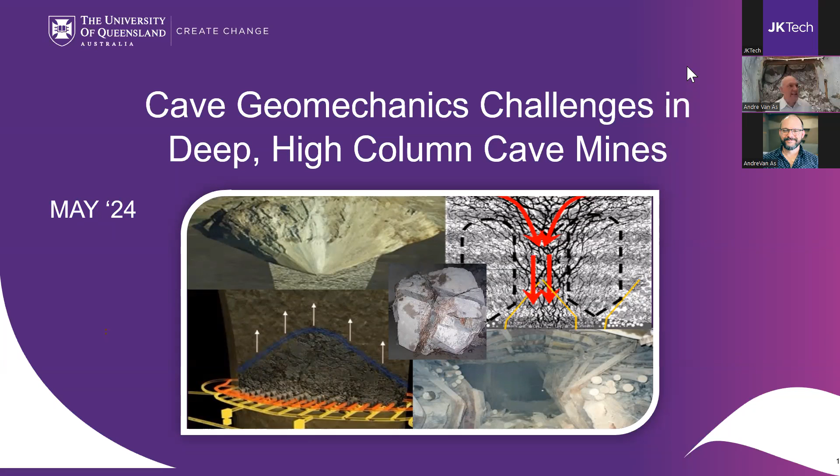Just to start, a little bit about myself. I'm an underground geotech engineer. I've spent just over 30 years working in caving and caving projects. I started my career with De Beers and then moved to Australia to help build the first block cave, which I'm quite proud to say I participated in along with some of the colleagues online. I worked at Rio for probably just over about 22 years, and then I set up my own consulting, only because I was missing out on all the good technical stuff, so I wanted to get back into that. I think I've been involved most of my career in caving mines, mostly underground.

I sit on a few review boards, and I get to see a lot of the caves. I'm fortunate to have been involved in many of them. I've got a few papers out on caving, and I guess my claim to fame is with Rob - we introduced the whole hydraulic fracturing in cave mining back in '97.

And then somehow I ended up joining UQ with the W.H. Bryan Mining Geology Research Centre at UQ. They established the Deep Mining Geosciences group, which they've asked me to lead. So just a little bit about that.

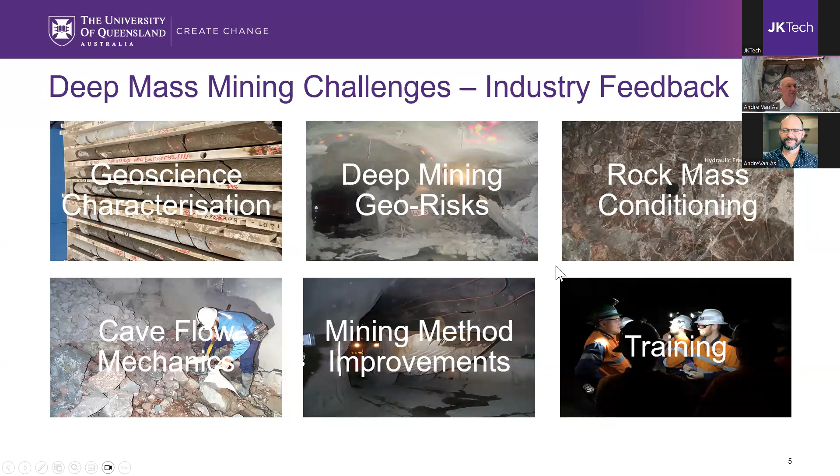Just in case I don't get to cover everything, I wanted to show you that there's pretty much 5 research pillars that we're focused on, and of course training is inevitable and a huge component of all of that, so I've had that as the 6th pillar to the work I'm doing. The first is geoscience characterization, because it's more than just geotechnical engineering - it's geology, it's hydro, it's all of that. That's probably one of the biggest concerns industry has as we're going deeper and facing cave mines, but I'll get into that later. The other ones are around deep mining risks, rock mass conditioning - note I'm not calling it preconditioning, because it's pre, post, and during. My hobby horse, cave flow mechanics. We're also looking at alternative mining methods, or improving existing mining methods so we better handle deep mass mining. And then, as I said, training is a big component, which I really enjoy.

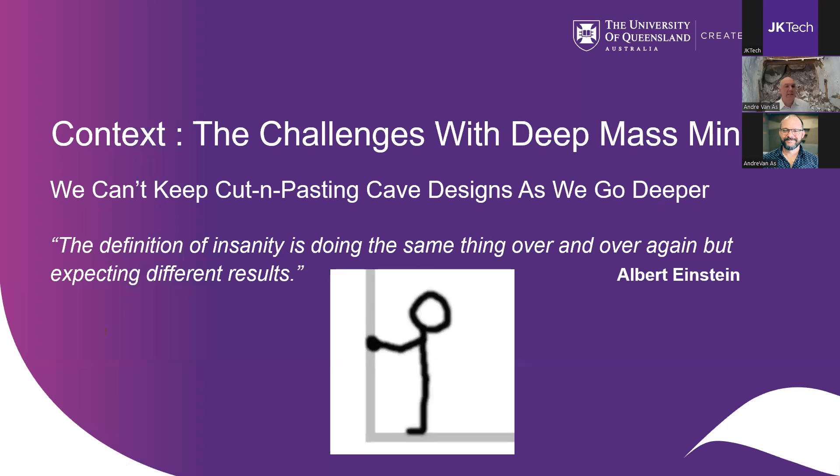So just a little bit of context first. You might get a sense of my frustrations on some of these topics because of the images I've got, but forgive me for that - it's the only time I get to show these. But really, my main point here is, as we're going deeper, we can't keep on doing the same thing, and we can't expect this sort of cut and paste approach that we've commonly seen, particularly in cave mines, to still bear the same fruit as we go deeper. So I just want to talk a little bit about that.

Why are we going deeper? Why are we focusing on deep cave mining, deep mining? Well, the fact of the matter is, there's this huge push to transition from fossil fuels to electric and so on. So there's a lot of critical minerals, and copper's one of those. If I just look at the copper analogy here, a lot of the big surface and near surface deposits are nearly completely exhausted. Outside of things like Escondida, even Codelco is going underground, is completely underground. And really, it's not a matter of running out of copper - there is copper.

There's lots of copper, but it's deep—we're talking about 2 to 3 kilometers. The question is, how do we tap into that copper? We're looking at doubling our copper demand; it has doubled over the past decade. And I've read, whether it's correct or not, that we're looking at mining more copper in the next couple of decades than we've mined in history. So clearly there's this drive for more copper, and as you all know, copper price is soaring—today it was around $5 US a pound.

There's clearly a need, and most of these large, massive deposits we find in deep ore bodies are pretty low grade. So it's simple economics: deep underground mining is complicated and needs a lot of capital. The only way we can produce those tons is with a mining method that can deliver large tonnage at low grades to make it economic.

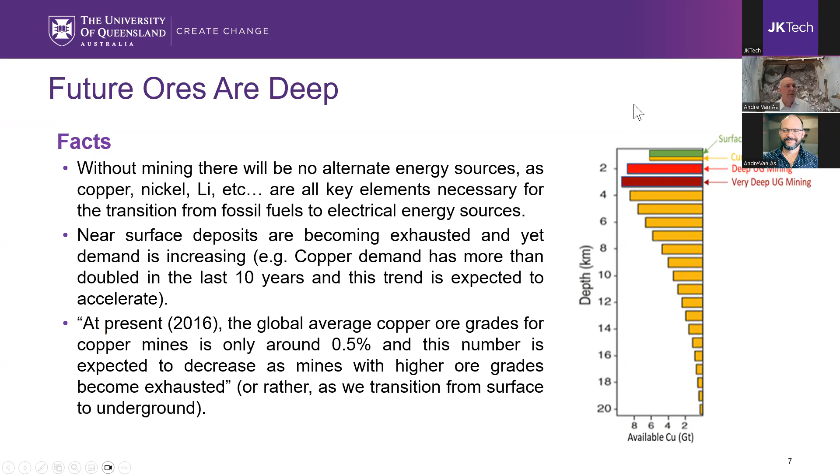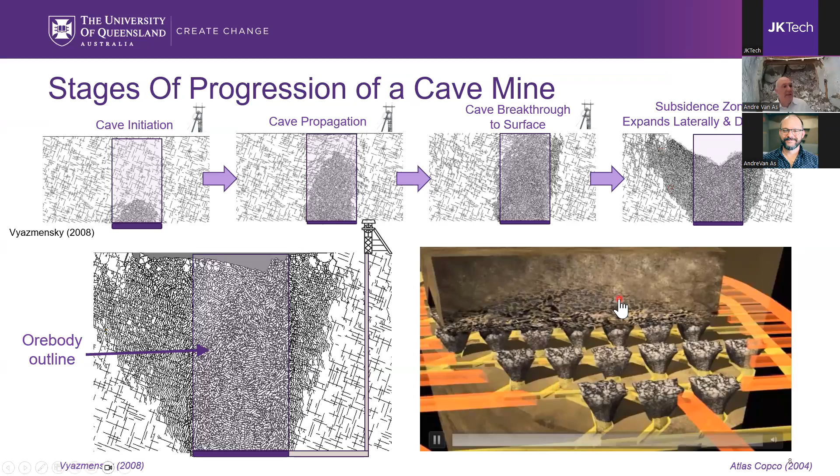And then as we continue to draw this cave, the subsidence zone expands laterally on surface. Now it doesn't become this bottomless pit hole—it does tend to stabilize, typically of the order of a couple hundred meters deep—but nevertheless it is an expanding subsidence zone, and as we continue to draw, the subsidence zone expands. So very simply, that's caving.

So why do we do caving? Really, it's a very cost-effective mining method—we use gravity and the stresses to break up the rock. We only blast the undercut, and after that we're purely at the mercy of natural forces. The neat thing about caving is it's really easy to mechanize. On the production level we have automated LHDs, or even if not automated, it's pretty regular geometry and layout, so it's quite easy to produce fairly high tons out of these mines. The only downside is you need high capital costs up front to establish and develop this intricate network of tunnels, draw points and drawbells. But once it's there, it allows us to produce a lot of tons at a fairly low operating cost.

It's also probably one of the safest mining methods, and ultimately it's probably best suited to extract low-grade, large deposits in large quantities.

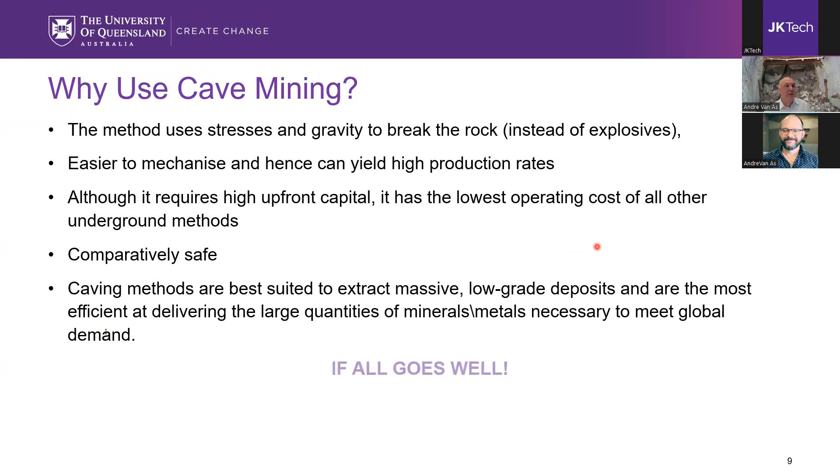Certainly it's probably the only underground mining method we have in our arsenal that can really meet the demands of metal in the future. And that is to say, if everything goes well. In all my time working on caves, I don't think I have an example where it's gone textbook well. All of them have their issues and problems, and I think those problems are going to be exacerbated as we go down deeper.

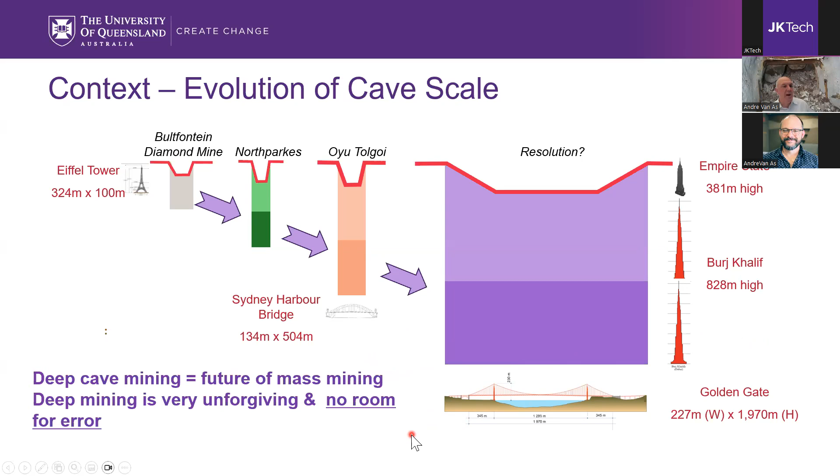And deep mining can be very unforgiving, with not a lot of room for error. Now, why do we go deep, you might ask? I think it's pretty obvious. We have these deep high column caves for a simple reason: it costs a lot of money, a lot of capital up front to develop these mines. So you can imagine if we have a very high lift, we can reduce our capital spend. We'd rather spend it once than several times.

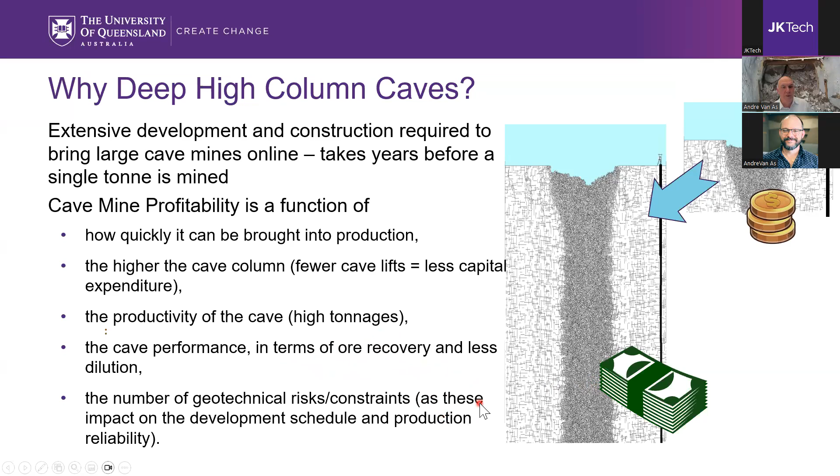So we see this transition from near surface shallow block heights to deep high column caves. You've got to understand that all this capital investment, if you look at what's public, Oyu Tolgoi is in excess of 7 billion, and most other caves cost billions to set up, before you've even mined a ton of ore. So there's quite a lot of risk up front, and you want to bring this cave into production as soon as possible, and want it there for the next 10 years or so. It's really a matter of profitability being a function of height, in effect. To meet these large tonnages, reduce capital spend, and reduce operating expenses, we really want to go deeper and have these higher columns, but they do bring about more risk, and I'll talk about that now. So let's talk about these deep high column caves.

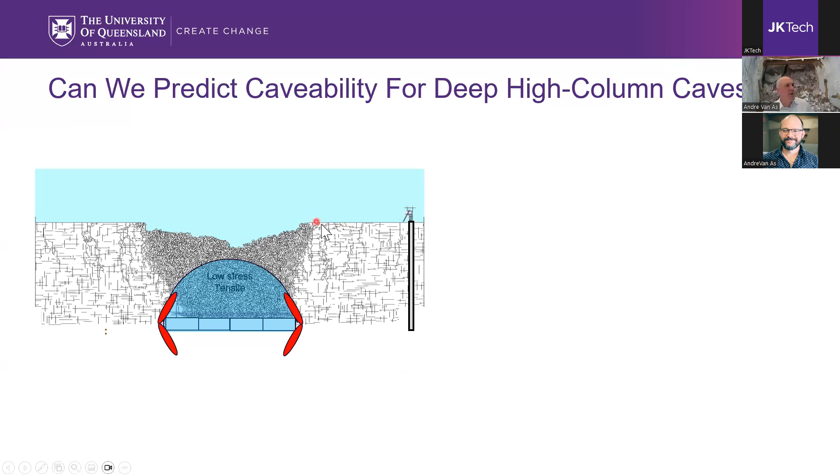So first thing, excuse my cartoons, but what I'm trying to show here is that pretty much these shallow caves that we've had in the past were really low stress caves, large tensile zones, where tensile zones are a function of the span. What you might argue is that a lot of the work done by people like Laubscher and so on to predict things like the caveability of the deposit were really based on near surface caves, where the stress regime is quite different. It's quite different to something that has a high column and deeper, and you've got to question how applicable these empirical criteria are for these deep caves.

Now, I'm a big fan of what Dennis Laubscher has done, and I'm not criticizing. I think he's really brought so much to the caving world. But we just got to be careful when we try and apply some of the empirical methods that were designed for a different environment and a different circumstance. We can certainly learn from them, but we just got to understand their limitations.

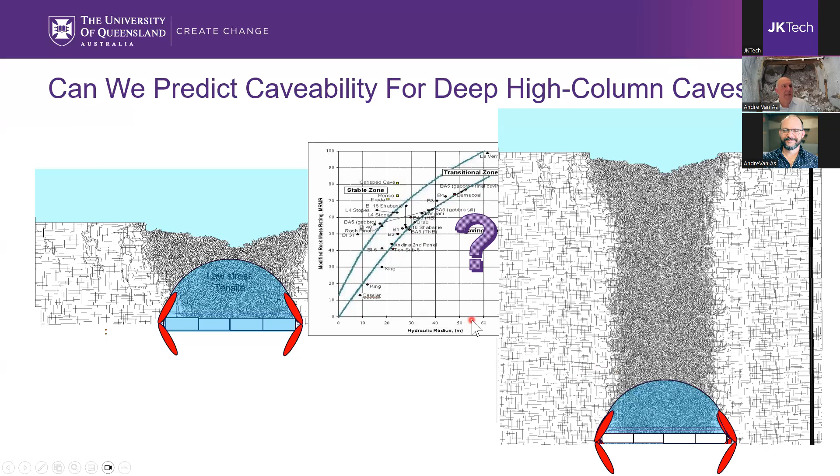So one of the big things with these caves is that we've got to realize that because they're deeper and because they have really high columns with large aspect ratios, the ability to cave is not just a question of caveability, it's a question of how these caves cave. If you look at the examples I've just pulled out of publications, you can see that potentially there's quite a lot of ore at risk that we can't recover. Remember that we've only got draw points to control the propagation of this cave, and then we're at the mercy of natural forces.

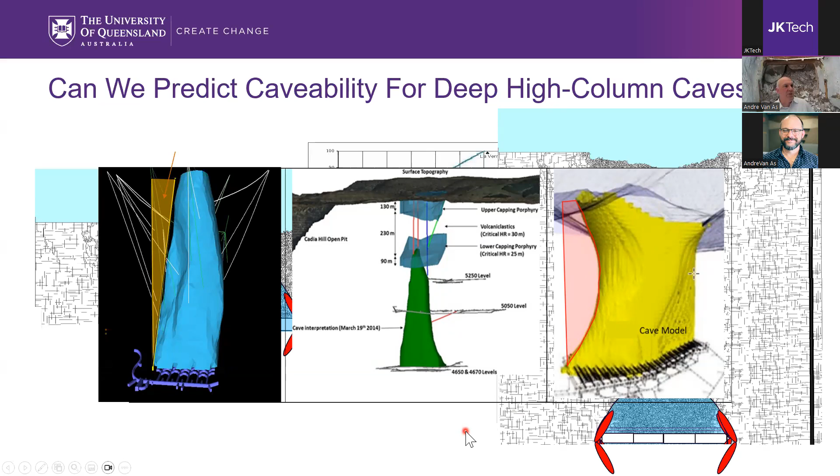So there is certainly a lot of precedent in our modern caves with these high aspect ratios for us to leave a lot of that resource behind. And that's a huge risk that we really need to address, and it can be addressed. I'm not saying it shouldn't be, but we must be aware of this. Certainly, I think it's very important that our shareholders and investors understand this, because if we go there and say we're going to recover everything at 100%, I don't think there's precedent anywhere in the industry yet that has done that. But anyway, it's a lot more challenging when we have these high aspect ratios.

So I want to just talk about undercutting now, and I want to say that it's one of those methods that's really important for block caves. The undercut level is key, and the undercutting process is really key to sustaining the integrity, or preserving the integrity, of the rock mass on the production level. We really need to be careful that we actually protect that rock mass.

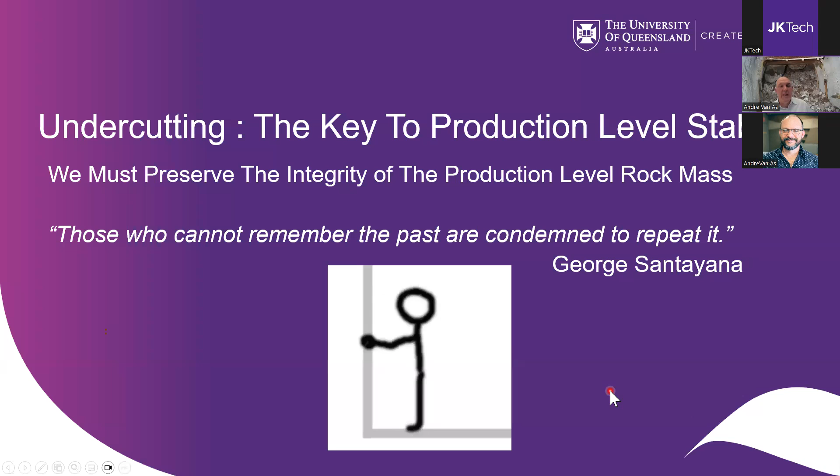So what is an undercut? First of all, I think I've already mentioned this, but just quickly - look, it's when we cut out the slot or the stope down below so that we can get caving to naturally occur. So we cut out the slice near the ore body, we blast that out across the ore body, and then caving is induced.

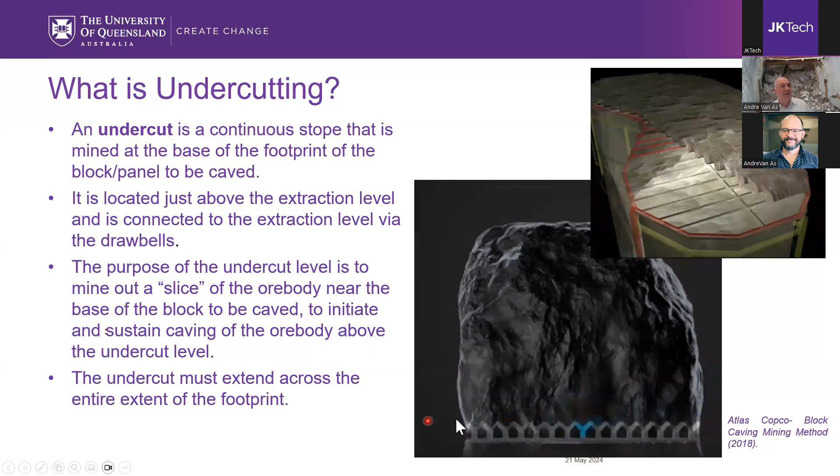Now, there's different types of undercutting, but how we do it is important. What we want to do when we undercut is preserve the integrity of these drawbells and these pillars between the drawbells, because you've got to realize that these drawbells and draw points have got to draw, especially with high column caves, probably well in excess of 300,000 to 500,000 tons each. So you can imagine a lot of wear, a lot of loading. And so if we're going to keep them in production over their life, we've got to really look after the integrity of that rock mass.

So this is where we come to the different undercutting scenarios. So the more classic post undercut, or conventional undercut - this is what characterizes this type of undercut - is that we have the drawbells and the pillars and so on, the draw points developed ahead of the advancing undercut face.

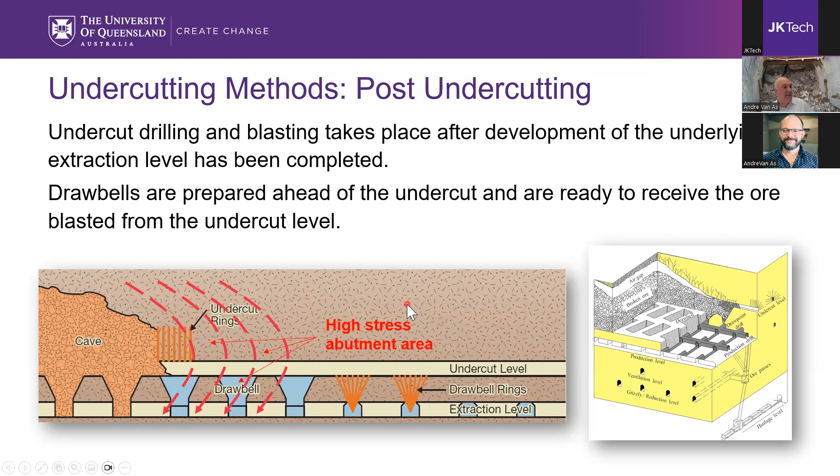The good thing about this method is that it does allow the miners to separate the development of the extraction level and the undercut level. So you're not constrained, and you can bring the cave on quicker. That's a really nice feature - being able to bring a cave on quicker is really good, because it allows us to get production earlier. The alternative to this is that we use what we call an advanced undercut, where the undercut exceeds or is in advance of the development.

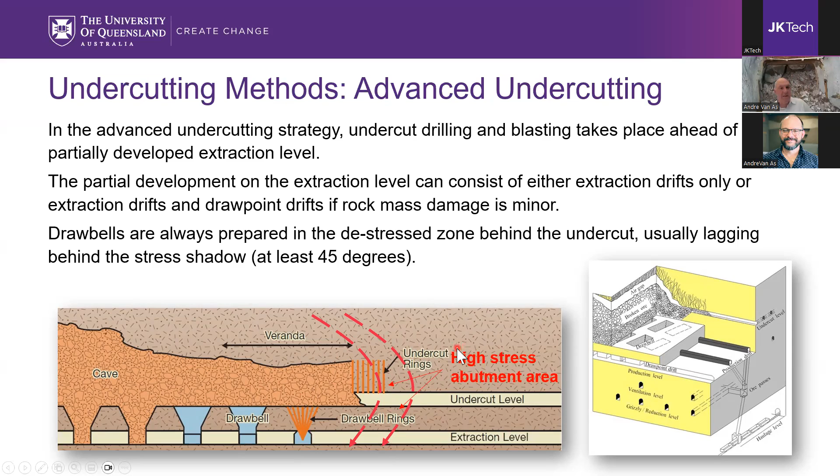The problem with this undercut, though, is that it does constrain the advance of that undercut. So you can imagine the logistics - that undercut rate in advance is really constrained by the development of the draw points and the drawbells. So it is a balancing act. It's very important that this is synchronized, and this does slow down the undercutting process. That means a cave with an advanced undercut comes online slightly later than, say, if you adopted a post undercut. But there are problems, right?

So you can imagine, especially when you have a lot of high stresses, what we find when we undercut is we get a lot of drill and blast hole dislocations. We get incomplete blasting associated with that. And so what we have is these pillars forming in the undercut, which I'm trying to show here.

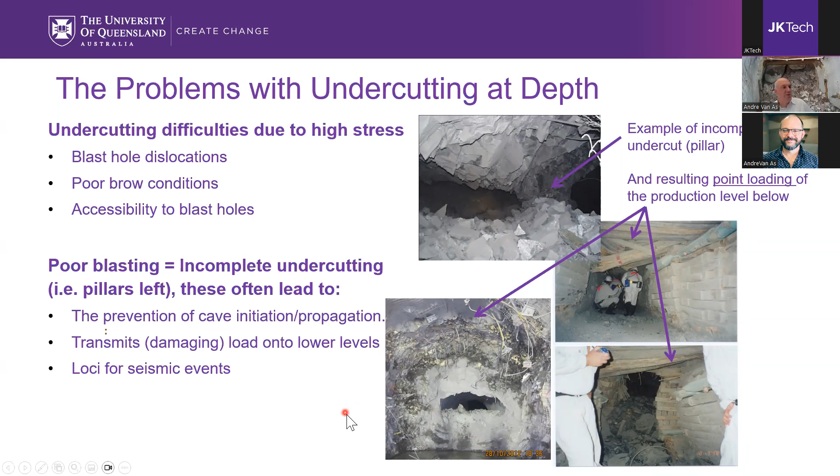And these pillars become stress concentrations. That's a real problem, because down on the production level below, all the stresses tend to focus and concentrate on that, and we point load the tunnels below. This tunnel over here - you can see this was a 5x5 or 6x5 meter tunnel that's completely closed. Why? Because we left a pillar up in the undercut. So this shows you how extensive the damage is.

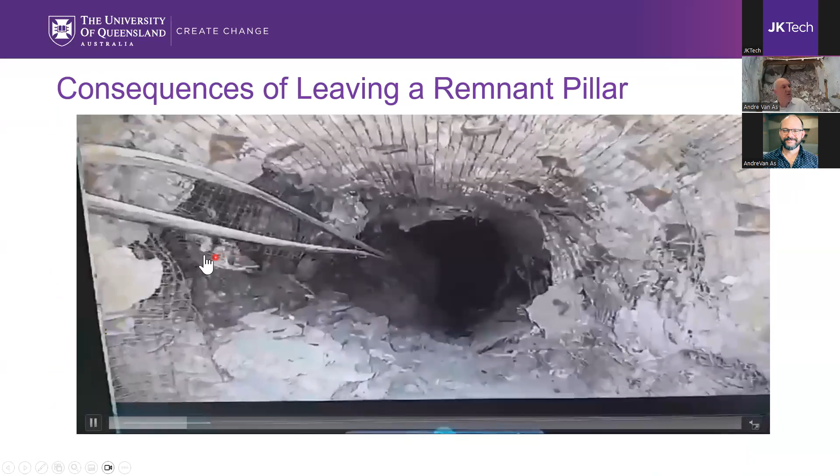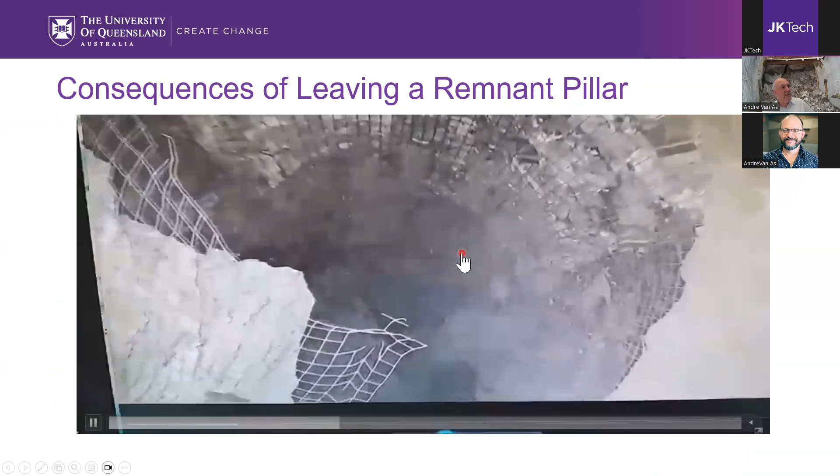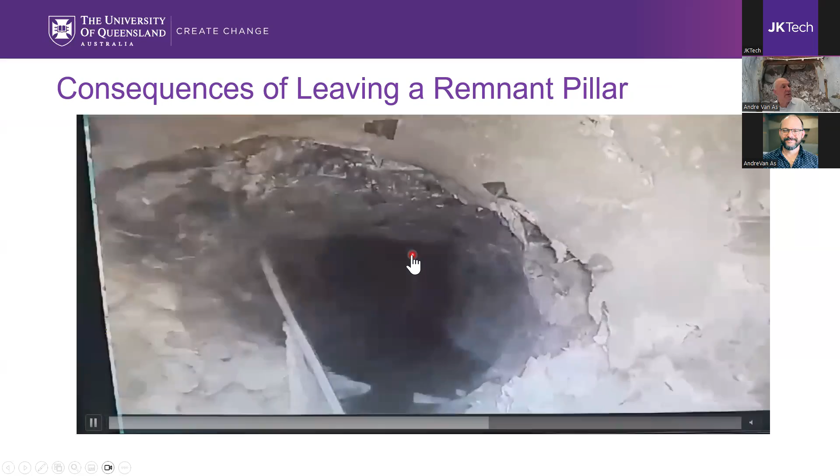What I'm showing you here is hot off the press - I won't tell you where it's from, but if you look at this tunnel, we're flying down a production level. Look at the damage that's caused. Now, this wasn't a rock burst - this is purely from a pillar left on the undercut. I won't tell you where, but the point is the damage is extensive. Imagine, this is the type of damage you can get if you get an incomplete undercut. You can completely obliterate or severely damage the production level below, because of the incredibly high stresses above.

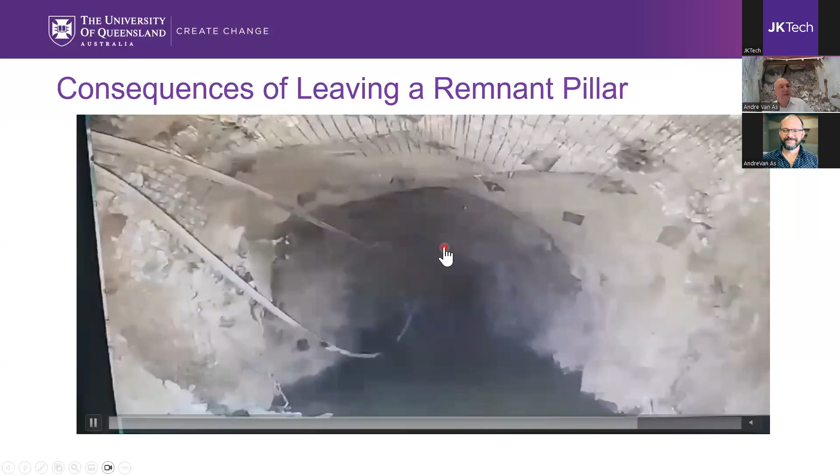This is the type of thing we've got to minimize, and we can't afford to leave these pillars behind. The problem is, though, the higher the stresses, the more difficult the drill and blast process is. So I won't keep going, but the other thing we've got to realize - I just showed you a problem with static stress, but we've still got the dynamic problems.

And here we have rock bursting that occurs in cave. This is not uncommon, where we have pretty hard rock and very high abutment stresses, and they can produce rock bursts. And they're not pleasant. What is a rock burst? It's pretty much a violent ejection of rock that typically explodes outwards.

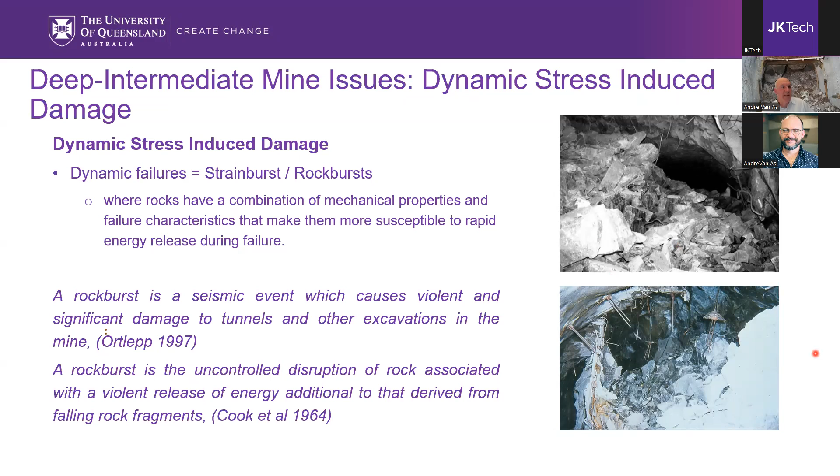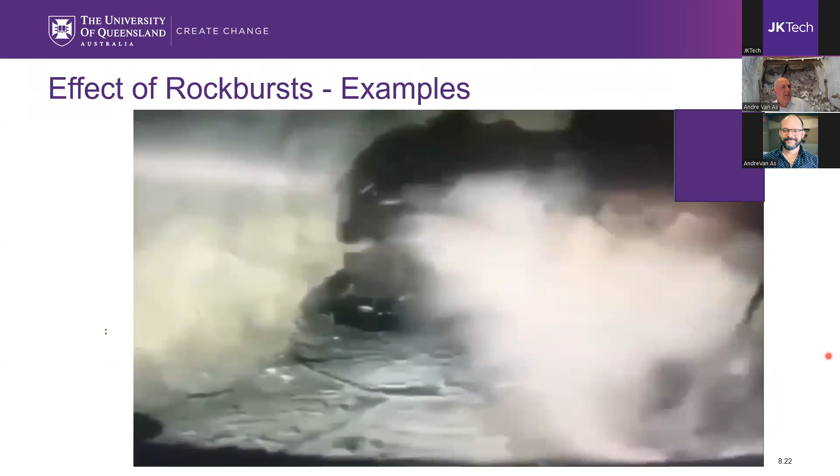I think it's best if I just show you some videos. If you look at these videos, hopefully you can see it - watch the wall on the right, and you can see what a rock burst looks like. There you go. Now, I just want to point out, both of those guys were okay. They might have had to change their underpants, but nobody was hurt here.

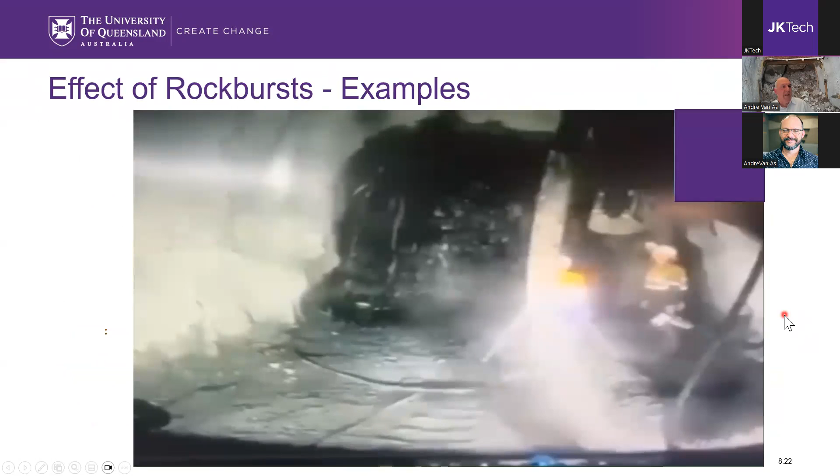So it just gives you an example of what a rock burst looks like. Here's another one - now you'll see the burst occurring from below in the footwall. Watch that LHD, watch this jumbo be ejected upwards. That's a couple of tons of jumbo being pushed up into the air through a seismic event down in the footwall. It's pretty impressive - the energies here are incredible.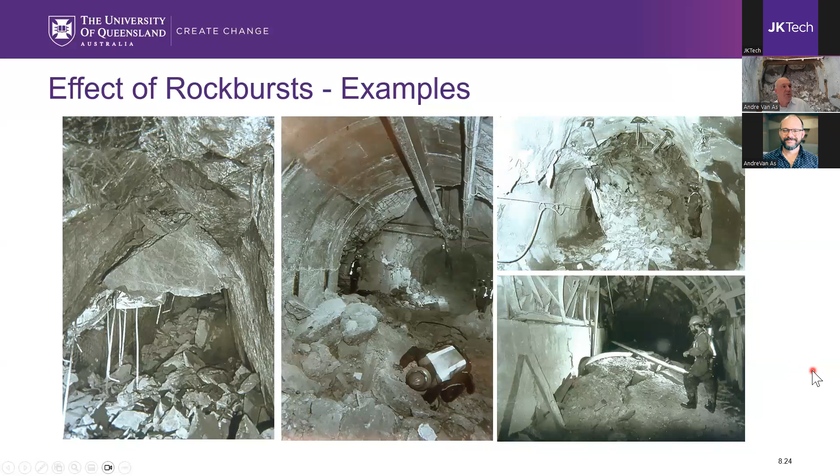What I'm saying is that we need to do everything we can to minimize this type of damage and exposure to personnel and so on. And the way we do this is sensibly undercutting.

Just as part of what we're doing in this space, I want to plug for the DMG. We're looking at undercutting methods, taking data from some of our mines, and thank you for those mines that have sponsored this. Particularly want to shout out to Oyu Tolgoi, who has the most extensive extraction level monitoring I've ever seen and has ever existed - that really allows us to look at that.

And we've got a master student here that's done a lot of excellent work, especially back analyzing all of this and looking at the type of deformations that we're seeing. That allows us to compare the undercutting methods. Now, we're not comparing models - this is actually real data. So we're comparing undercutting strategies, and we're looking at the deformations that we're getting on the extraction levels.

We're trying to evaluate and demonstrate quantitatively exactly what this is, what types of undercuts are best for deep caves. From that, we hope to come up with some suggestions, modifications, and perhaps ways of improving the undercut method. We're also looking at things like rock bursting and being able to quantify the pros and cons of the different methods and the risks associated with these methods. Really the idea is to develop a reliable, suitable mining undercut level for these deep environments.

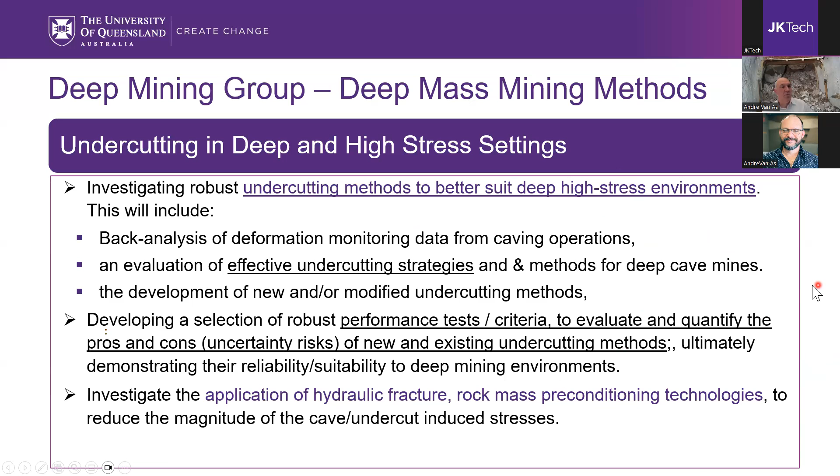I'm not going to talk too much about rock mass preconditioning because I have a section later on, but obviously one potential way of managing high stress and rock burst is through rock mass preconditioning using hydraulic fracturing. This is what we're doing currently, and to anybody who has provided data, Northparkes, Freeport, we really appreciate your support.

The other thing I thought I should throw in here - we're also looking at geohazard management, doing some work to use real data, not models, doing back analysis of this data, linking it in with the production and the undercutting, and looking at how we might be able to use machine learning methods, data-driven applications, to better design and better manage these geohazards. So we're looking at developing more real-time geohazard or georisk tools that could, using machine learning, be more predictive and give us a bit of a warning about potential hazards occurring ahead of undercutting.

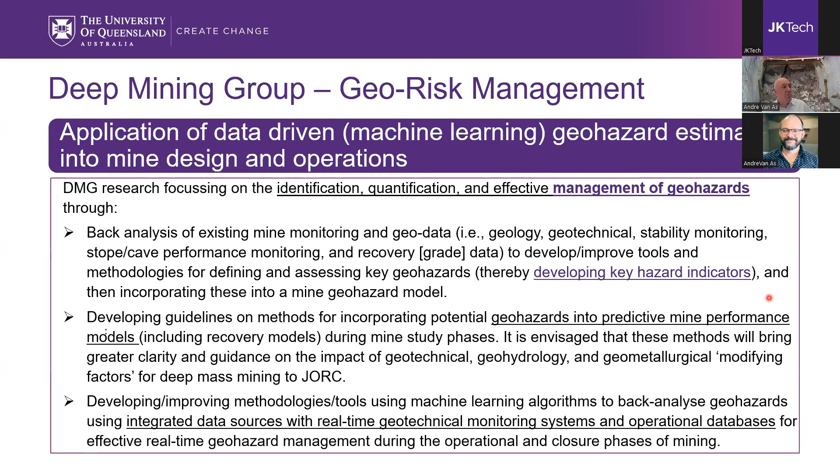I'm not going to elaborate on that too much because I haven't got time, but for those of you who might be interested, I'd love to talk to you later.

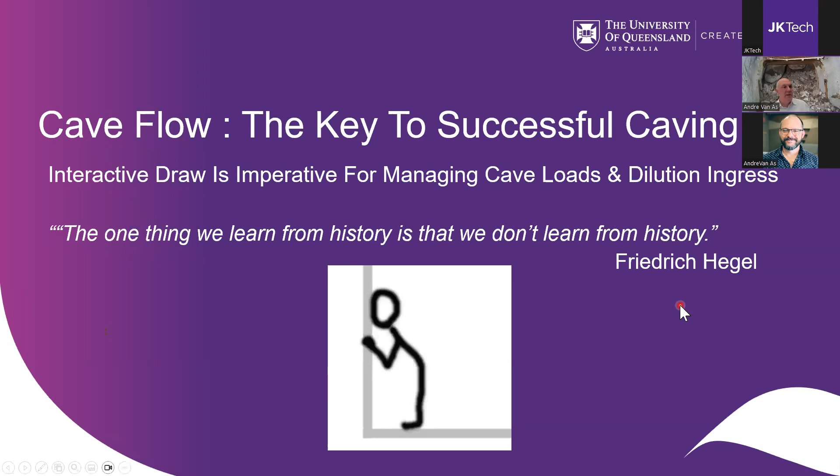So now I get to talk about my bugbear, which is really cave flow mechanics. The key terms here are interactive draw, and that's really important to be able to manage cave loads and dilution ingress. I think it's probably one of the most important topics that we're researching.

So the challenge, for those who don't understand or appreciate this, is that you can think of these draw points, draw spacing, as these big silos that we develop, and as we draw from these draw points, we develop these cones of movement.

Now theoretically, what we're trying to do is get the material that's moving in the cave to move as a mass flow. So what we're trying to do is get it all moving uniformly, and the only way we can do that is to design our caves to be correctly spaced. In other words, all the draw points need to be near enough to facilitate this mass flow and this interactive draw.

But at the same time, we've got a delicate balance between interaction and stability of the extraction level. We can't have the pillars and these silos or drawbells too close, otherwise we cause instability in the pillars. So there's this tension between stability and interactive draw.

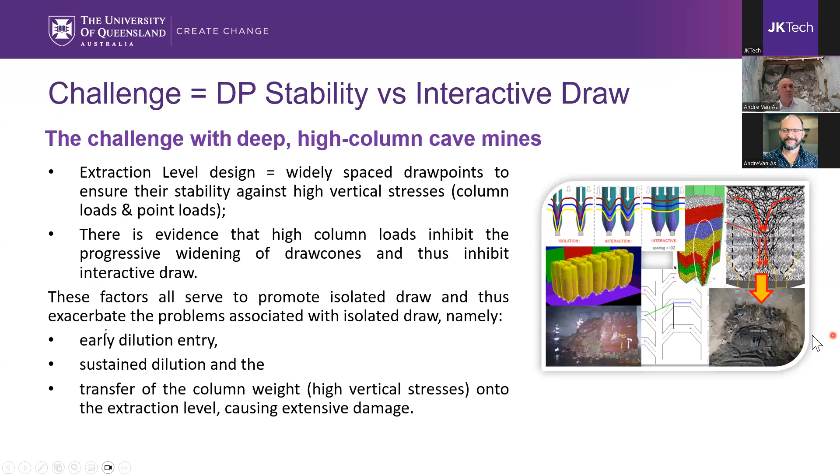The consequences of this lack of interaction, which we call isolated draw, is that we get a lot of problems associated with that. On the left, I'm trying to show the difference between interactive draw and isolated draw. Assume this brown-looking rock is waste. If we have no interaction between these ellipsoids, we get a bit of dead ground between them, and that means the draw cones are narrower, so the rock moving down into these draw points moves a lot faster.

So if you've got waste material sitting above you, that means it enters your draw points a whole lot quicker.

What I've got on the right here is a particle flow code model developed over 20 years ago. These thick black lines are essentially contact forces between the particles, the balls. Where you see thick black lines, that's where the stresses are concentrating, where the forces are highest. This shows that if you're getting a lack of interaction between these free-flowing cones, the stresses can concentrate between them, and that's not good, because it means the stresses can push through them.

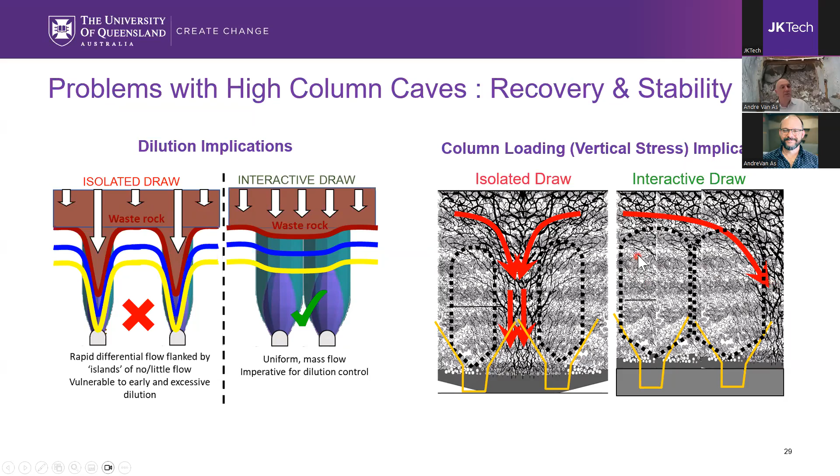Now what does that mean in reality? It means that if these stresses are channeled into areas that aren't interacting, we can have enough stress to punch through down below and close draw points, as I'm showing here. This was a tunnel on the bottom - it's completely collapsed because of the loads above. We get these point loads forming.

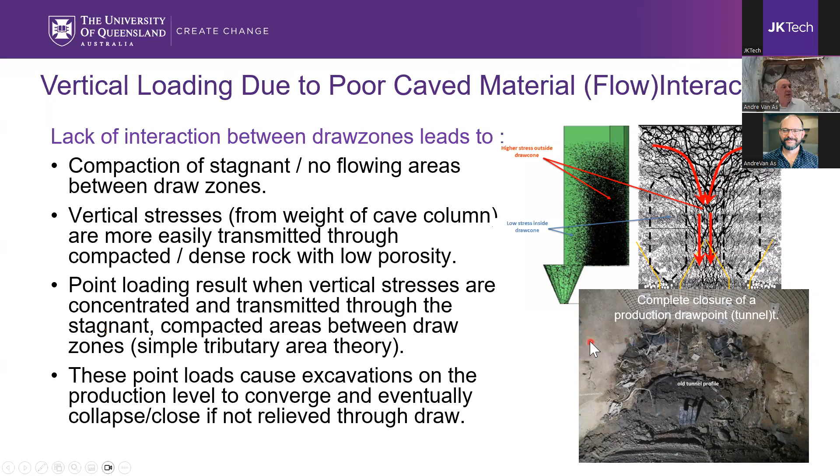Here's an example of point loads from pillars left behind or crushed pillars - things not interacting. This cuts across the industry - there's very few mines that don't have crushing out of their draw points because of weak rock and pillars that have been left behind.

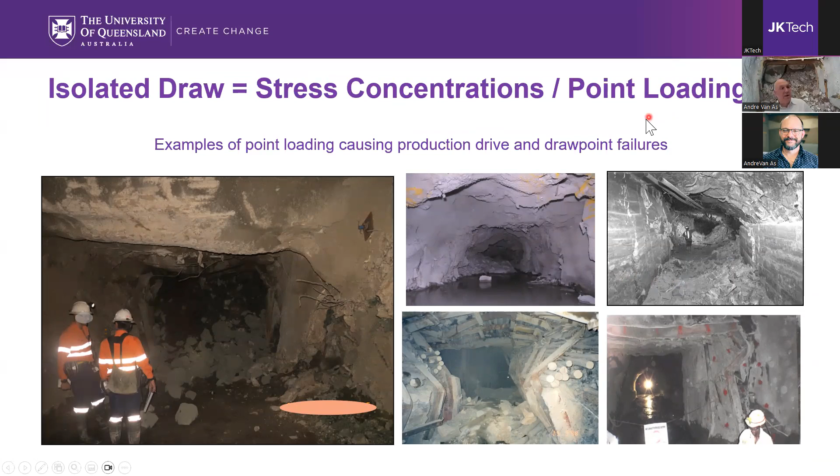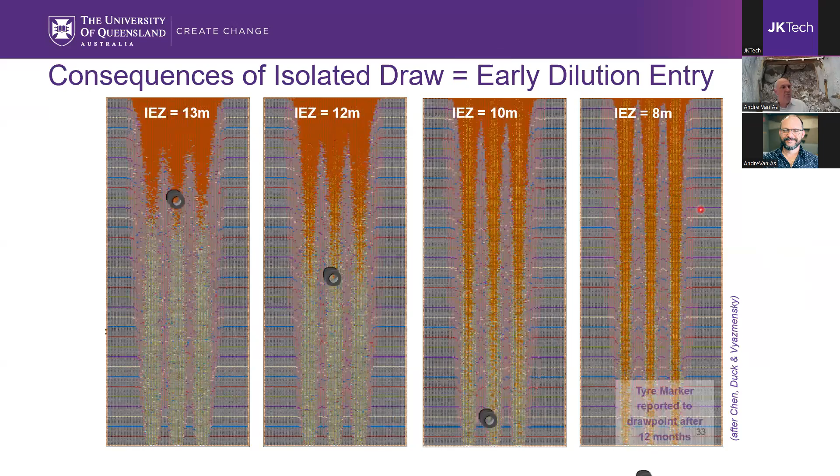If that red-brown material is waste, that means you bring it in a whole lot quicker. When I showed the first slide, that black thing is supposed to represent a loader tire. In my past life, I used to put LHD tires on levels above to see when they come down - much to the disgust of the maintenance manager who had one of these things stuck in the crusher. But the point is we wanted to understand how quickly the material flows down into the draw points and how it flows.

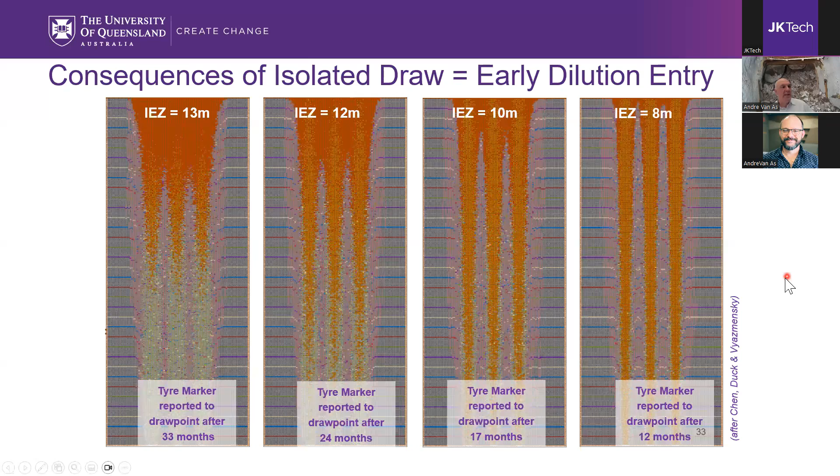We've got a lot more now - excellent data nowadays, cave trackers, smart markers that are a lot better at looking at this than an old loader tire. But the point is that when you have isolated draw, my loader tire got to a draw point in just 12 months where draw was narrow, versus 33 months when it was wider. That's real data with a cartoon to illustrate. My point is that if we don't get interaction, we get a whole lot of dilution really quickly, and there has been a lot of precedent of that.

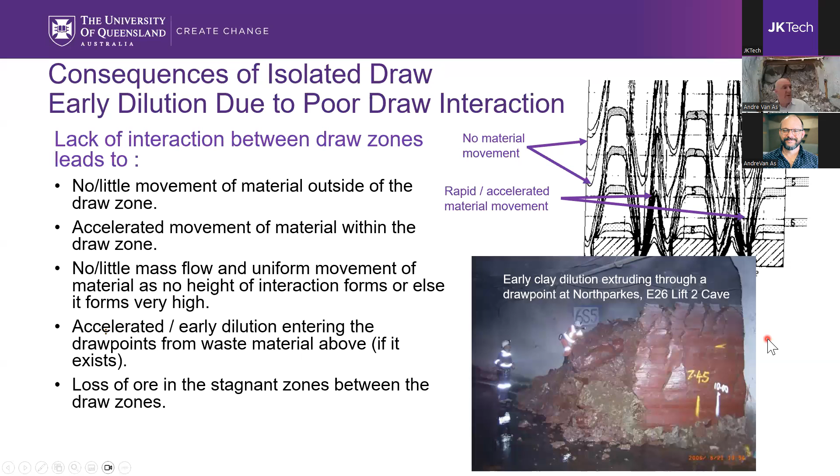This is just when they had clay in the E26 Lift 2. I see Sarah's online, I'm sure she can tell you a lot more about that. But these are really real problems. If we don't want this type of thing - I mean, we're a copper mine, not a pottery class. We don't need this happening early, because in effect we sterilize ore. So it's really an important problem.

How else can we see this manifest? Well, if you just look at open pits, you see these what we call rat holes forming. If you start seeing this type of thing on surface, you know that interactive draw was never happening on your mine. So I guess there's a lot of issues with that.

Now, why do I care if I have these little rat holes forming on surface? Well, if you're in an area that has torrential monsoonal rain, and now you've got these conduits down onto your extraction or production level below, you can imagine there's a lot of water channeled down here, and that could be quite catastrophic from a mud rush point of view. Not nice. What we're trying to achieve in caves is interactive mass flow, not isolated draw.

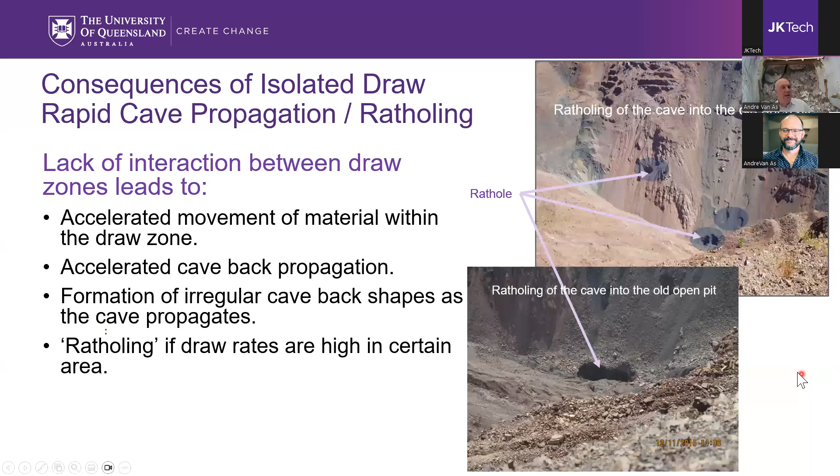One of the biggest projects, and thanks to our sponsors here, is that we're looking at interactive draw versus mass flow and isolated draw using real data. So we're looking at cave trackers, smart markers, any markers, as well as draw point observations - the grades from the draw point, what type of geology is coming through - all of this data that we're integrating and linking with production tonnages.

And the reason we do that is it's cause and effect - we've got to look at how this mine was drawn versus what we're seeing. From the data, we're able to look at the different flow mechanisms that are predominating. And it's a woeful tale, to be honest, because almost all the mines we've been looking at are showing some form of isolated draw, if not predominated by isolated draw.

So it's very important, because we're trying to achieve interactive mass flow, and we really need this because there's a lot at stake. We've developed these mines deep, we have these huge high columns, and we need these mines to stay operational for their life. We can't afford to be diluting them or crushing them because we aren't able to dissipate stress. So interactive draw is really important.

The data has been remarkable in that it's really showing - well, it's really showing what we already know - but we are looking at how we might be able to draw caves and sequence the draw to try and minimize the isolated draw effects and get more interactive draw occurring. And I guess there's a lot of work to be done.

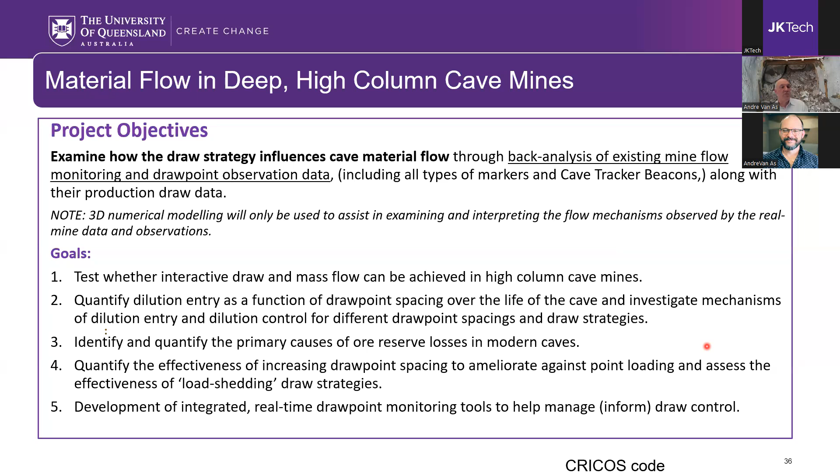I'm quite pleased, and I'm pretty sure as we use more machine learning and AI technologies, it will be even better and faster to predict how the material's flowing. I guess one of the things this is also pointing to is that we're going to come up with another way of designing our layouts underground, because once we've built these caves, we really don't have the flexibility to change.

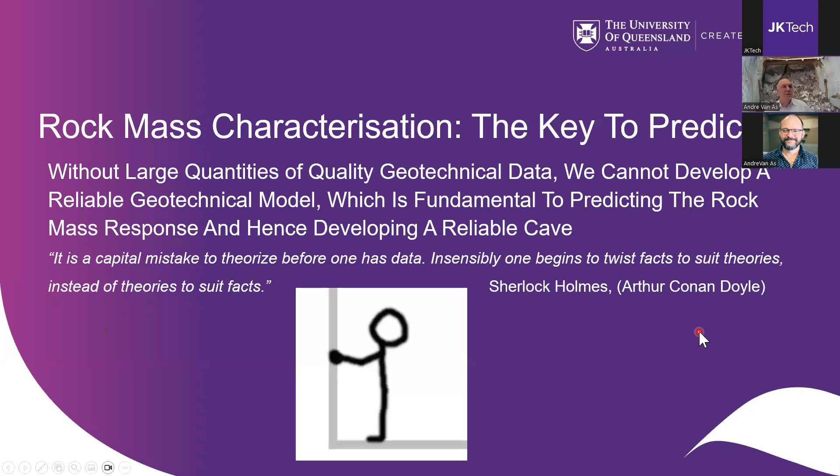I'm not going to talk too much about this, but obviously one of our biggest concerns is our inability to predict the rock mass response, especially in caves. Since I've left Rio and had more exposure to other mines and reviewed other caves, I'm pretty disappointed by the amount, quality and quantity of geotech data that's collected. Frankly, we cannot develop reliable geotechnical models with token data.

I mean, it's not an afterthought. Right from the exploration phase, we need to be thinking about geotechnical data collection, not just thinking about it as an afterthought.

We need to be collecting it, and a lot of it, and good quality. And when I say that, I mean we need to develop this reliable geotech model, because this is the basis of all our predictions, all our modeling, and so on. We can have the fanciest 3D model, but if the data behind it is suspect, we've got no chance of being able to do any predictions. So we really need to be more confident and do better in this space.

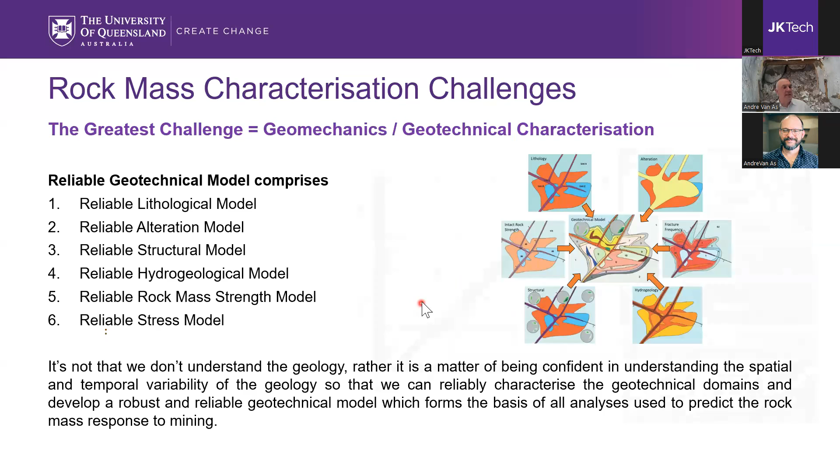And to that end, I just want to show this. Some mines I'm coming across have, at best, RQD data only or initially, and people say, well, at least we collected that. Well, I wish you hadn't, actually, because it's telling me nothing.

RQD is very vulnerable to orientation. It suffers from an orientation bias. What I'm showing by this little diagram here on the right, thanks to Jarek Jakubec, is that RQD can vary depending on the orientation of your drill hole. It's a very poor index of rock quality.

If you look here on the right, I'm just showing you some core trays. All of these three trays have an RQD of 0, but I'm pretty sure you're not going to design your tunnel to go through the top one, right? You'd much rather design it for the bottom one. So unfortunately, if all you've got is RQD, you have no idea.

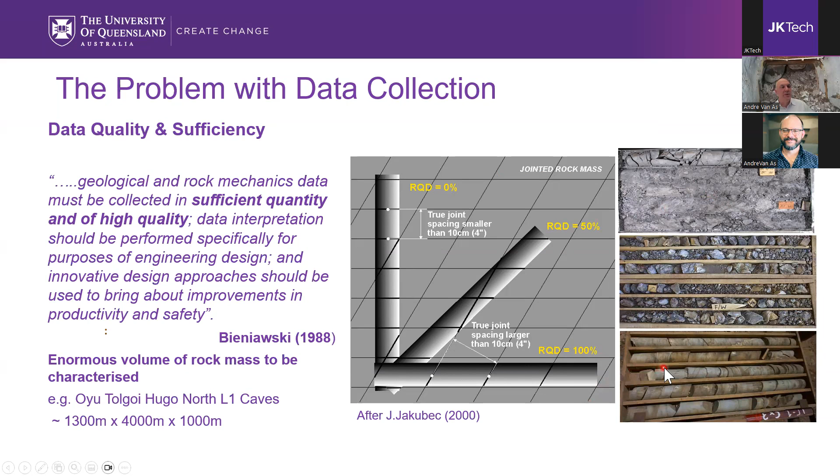So I just wanted to point out that quality data is absolutely imperative if we're going to do justice to predicting rock mass responses. Now, what we're doing in this space is a project that I must say has been struggling to get going. But what we have found is there's so much data collected outside of just geotech logging that isn't being used. So I've got this project called Data Fusion.

And what we're trying to do is take all of the data sources that we have, merge them, integrate them. I could have said data integration, but it's just not as sexy as Data Fusion. So, Data Fusion: bring all the data together and let's have a look at what it's telling us.

So we're talking about not only the geotech core logging, but the geology logging, and especially the downhole geophysical data, the ATVs, the full wave sonics, the multi-channel sonics, the hyperspectral logging. There's a lot of information that we really don't do justice with.

So what we're trying to do is integrate this data together so that we can start looking at where we lack data in one area. We might be able to fill it up with gaps from another, and use this to form a more reliable model. It really helps plug the need, especially when we have sparse data or poor data. This really will help.

And so this project, I think, is really an important project. We're making some headway. There's a lot of really novel scanner data out there, but we still lack integrating that data into one, if you like, database. And I think that's where we're going in the future.

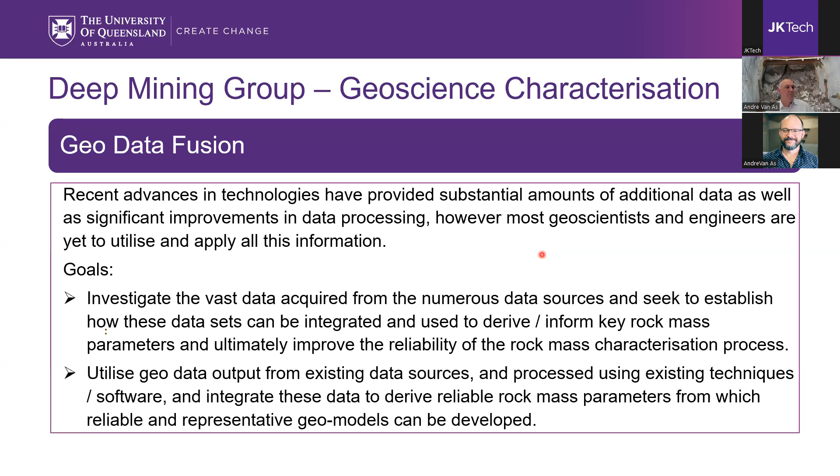Just a quick topic on rock mass preconditioning. Why do we do it? What I've talked about here is really around hydraulic fracturing, and I've called it rock conditioning rather than preconditioning. What we're trying to do is really weaken, if you like, the rock mass, change the modulus, lower the stresses, and all this type of thing by injecting fluids into the rock. Now, I've been doing this for a long time, back in '97, and fortunately we have come quite a long way as far as improving the technologies to do it.

We don't drive a dirty, great big diesel truck underground like I used to do. It's now all electric and so on. But as far as understanding the mechanics behind hydraulic fracturing and how it's influencing the rock mass, we haven't really made any inroads there.

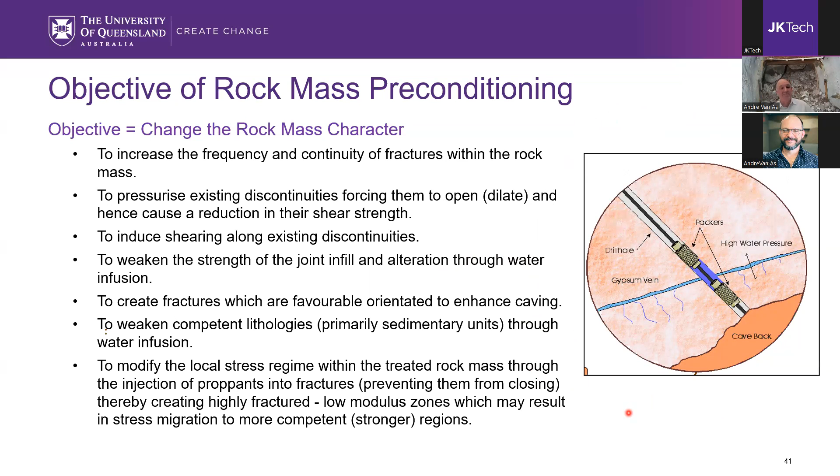That's not really empirical or qualitative. What we really want is to understand, from a caving point of view, what we're doing to that rock mass when we inject hydraulic fractures into it. How are we breaking it? How are we changing its character? Are we reducing the rock mass strength? Are we changing the stresses? Everybody says yes, because we've done it everywhere.

But most of the work that has been done is rather observational or qualitative. I can say from personal experience that I have managed in the past to elevate the stresses considerably by injecting hydraulic fractures into a high stress rock mass and putting in proppants. So I thought I was going to help reduce the modulus, but all I really did was raise the stresses. We best know what we're doing in this space, because otherwise we can make a bad thing worse rather than better because of our ignorance.

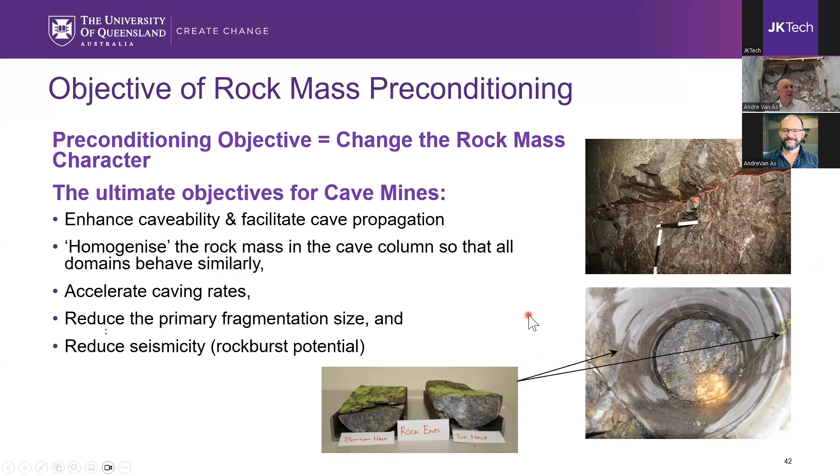In the DMG space, we're looking at a lot of work analyzing hydraulic fracturing monitoring, basically using more back analysis of mines. We've been doing this for over 20 years, and we're trying to get the mines to collaborate, give us this data, and improve our understanding of hydraulic fracturing so we can modify these mechanisms.

The other important reason for this is that we sort of think we can just simply apply it as we go deeper. But some of the hot dry rock projects completed around 30 years ago, certainly in the EU, show there's a lot of precedent that we cannot create horizontal hydraulic fractures in deep rock masses — all we get is downward migration or shearing of these fractures instead of opening mode. That's quite important to understand, because it means hydraulic fracturing as a tool to de-stress rock masses at depth could just be ineffective.

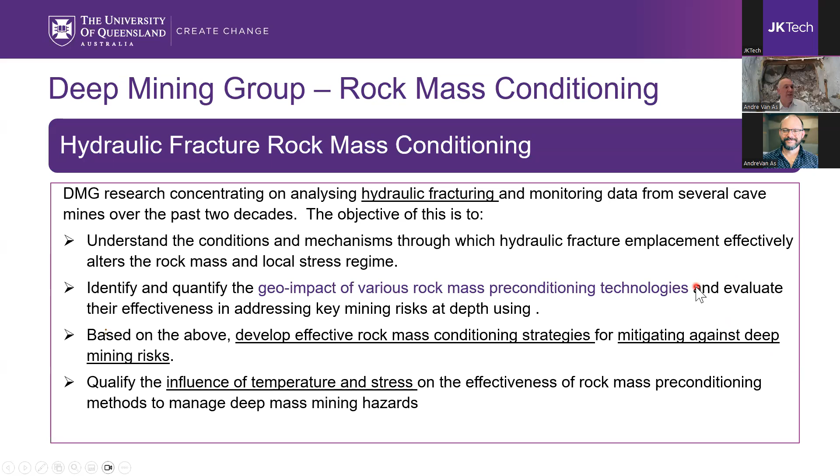Part of the reason is how hydraulic fractures form at depth, I guess, is quite important, and I don't believe that we truly understand that. I think there's a lot of ground to be covered and a lot of work to be done to understand how stress, temperature, and so on affect the effectiveness of hydraulic fracturing as a preconditioning or hazard reduction method.

Now, I guess finally, I want to talk a little about professional development training. I think we all know we're in a bit of dire straits in the mining industry. There's the so-called gray tsunami happening in the US, where more than 50% of their workforce is going to retire in the next 10 years, or by the end of this decade, and that's pretty serious. This is amplified by the fact that we just don't have many mining engineer students coming through. We're finding that a lot of schools are closing. From an undergraduate point of view, we're in a bit of strife.

We're not turning out engineers, and to be honest, in many cases, the engineers we are turning out have to cover such a wide content and syllabus that they're not necessarily digging deep into some of the content because they have to cover so much. So I guess this is leading to a pretty significant skills shortage that we're concerned about in the industry.

I've been doing professional development training, particularly for professionals unfamiliar with caving, mostly caving and underground geotech focused. It's just amazing how well that's gone. I haven't had anybody tell me that was a waste of time — I think most people have got a lot out of it. But it shows there's a desperate need to train up our professionals, and also to bridge the gap between our graduates and the professionals we need. So it's not only a matter of upskilling them, but also giving them that practical experience as well.